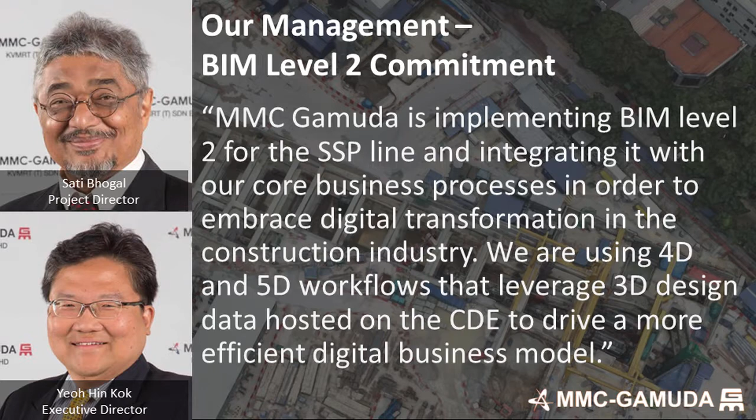So, two key characters, and Post-Inchok mentioned the importance of management support and C-suite level support, and these two characters have not faltered. Sati as a project director, Yeoh Hin Kok as the executive director, they have been hugely supportive. They have been dogged in their approach, and they are very committed to making BIM successful on the Line 2 project. And you can see that from the accolades.

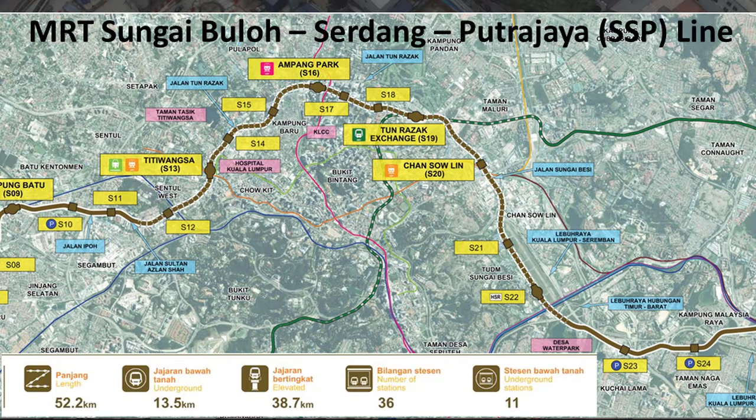So again, just to echo the detail that's already been provided by Post-Inchok, for the underground section, which goes from Jalan Ipoh through the city, connecting with the hospital, KLCC, Tun Razak Exchange, down through Bandar Malaysia, and out to Desa Water Park, that entire alignment, 13.5 kilometres of underground tunnels, 11 stations, 10 ancillary structures, and all of the other pieces of work were all designed in BIM.

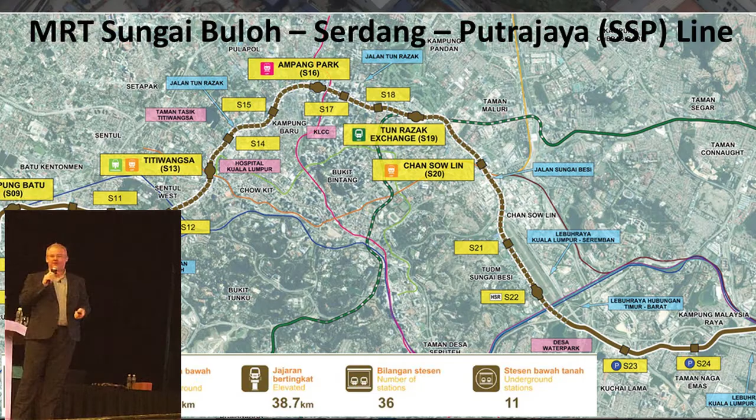So we're designed in Revit, drafted in Revit, and modelled. I'm going to show you some examples, and this is one of our stations. This is Chan Sow Lin. This is the station box where the first TBM tunnels have been completed. We have successfully completed both drives, and this is a model from that station, and this is the outcome.

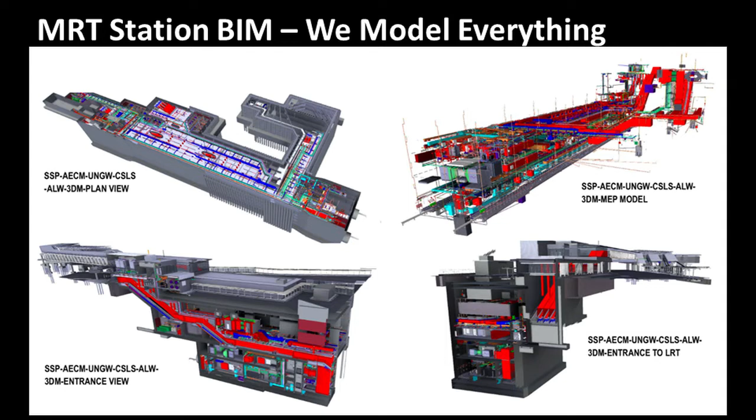Now, I love this presentation. This is fantastic. You guys look at this going, wow, it's so complicated. You would not believe how much heartache, how much hours of blood, sweat and tears, and how many arguments went into producing these models. You can see a structural model, you can see a building services model, you can see architectural models. The biggest challenge is managing to deliver these models in an environment where no one's done this before. So kudos to AECOM, kudos to SAA, kudos to all the consultants who stepped up and didn't give in and kept pushing and pushing to get us this level of coordination.

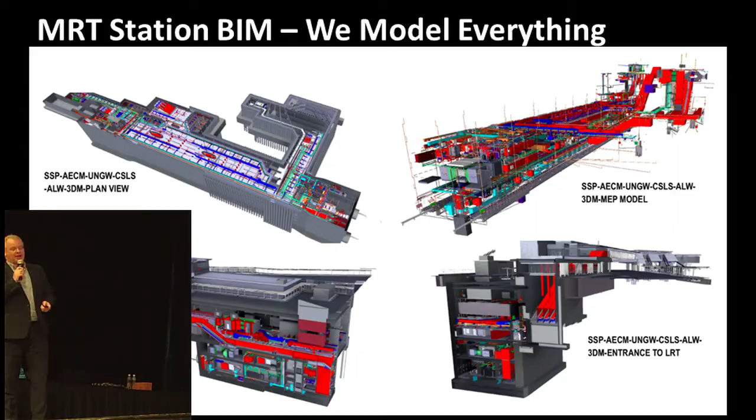It is an incredible amount of work, and it's never seen. Nobody ever stands up and says how many thousands of hours go into these models. So it's very important to recognize that there's a huge amount of effort goes to get us this level of coordination. This is the Chan Sow Lin site a couple of months ago.

How many people think this is an aerial photograph? Quick show of hands. A few people. Most of you have seen my presentation before. Who thinks this is a 3D model? Wilson knows. This is actually a 3D model of the construction site taken by drones. And for us as a contractor, this is one of the biggest innovations on the project.

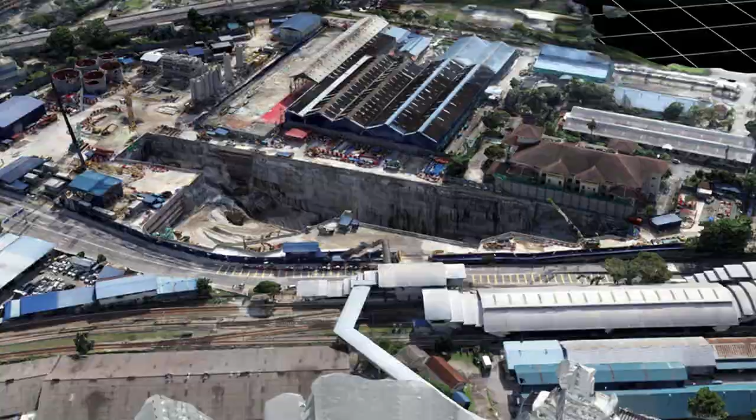Some of them were based in the project office, some of them were based in their home countries. So this was actually structurally modelled in Taipei. This MEP model was built between the Hong Kong office and the KL office. And you can see the complexity of these systems, you can see the density of the services.

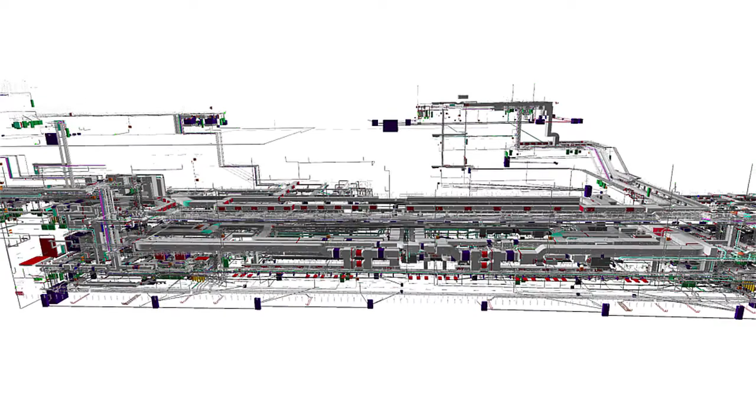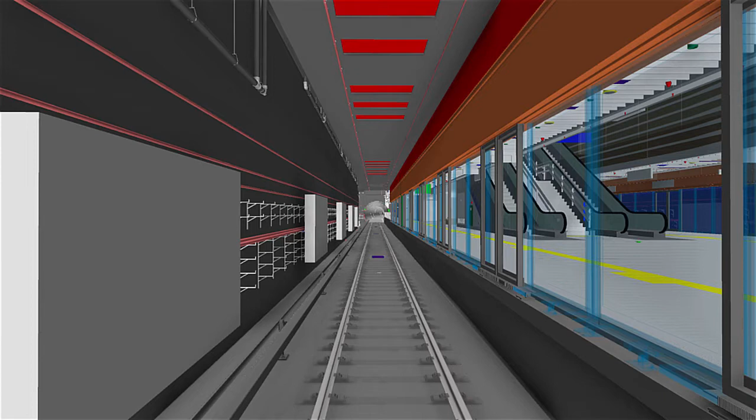And this is the OWC model. Again, big congratulations to the OWC contractors who've stepped up and delivered these models. And this is what it looks like on Line 2 arriving in Chan Sow Lin Station. We have the hangars modelled, we have the platform screen doors modelled, we have the vents modelled, we have the signage modelled. Everything that we have to build has been modelled and to a greater extent coordinated.

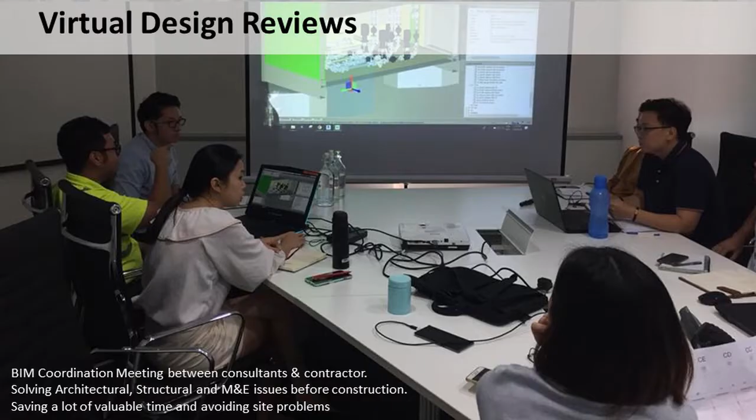One of the big challenges as a contractor working with and collaborating with consultants in a design and build is coordination. We've taken a very proactive approach with these VDRs, using the model and processes to manage the coordination.

We have a workflow laid out, a 7-step dance that we go through to create a VDR. I won't get into detail, but it's a repetitive cycle every 2 weeks: consultants produce models, we share them on the CDE, we run a coordination workshop, we share the outcome, and then we repeat, repeat, repeat. It's an ongoing, endless process.

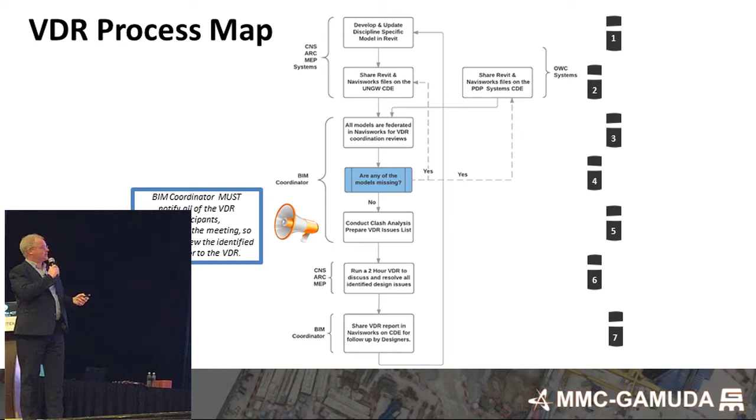The key point in running these VDRs, as already mentioned, is you have to make somebody responsible for identifying and fixing the problem. It's very easy to see a problem in a model - anybody who's looked at a 3D model can find problems. Getting the architects, engineers, even the coordinators to resolve those problems is crucial.

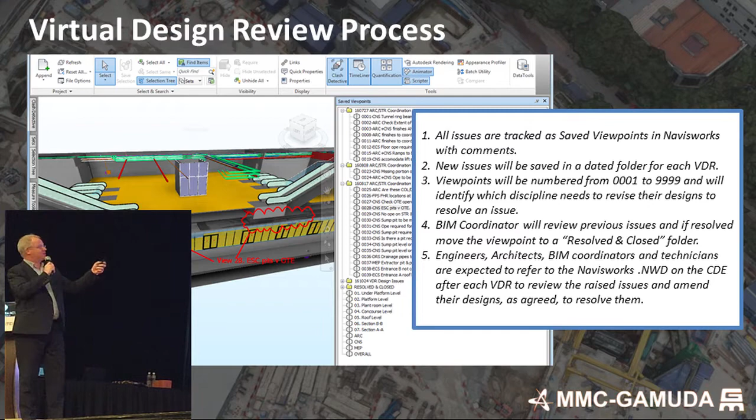So the system we set up between the consultants, ourselves as contractor, and the MRT was to use the common data environment as the go-to place to understand what the issues were. This is an example - a system we commissioned at MMC-Gamuda called BIM Collab, a web-based collaboration platform.

So a top tip: if you're going to run a BIM process, you have to project manage it. You have to identify the issue, allocate it to a party to resolve, give them a time frame to do it, and follow up to get completion.

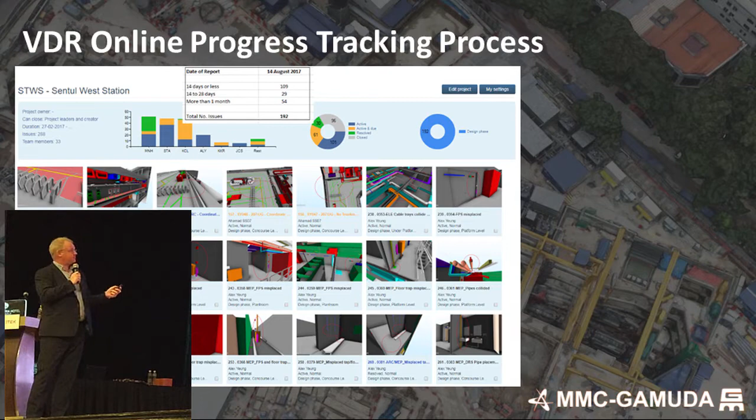This is an example of where we go from design detailing to construction detailing. The video I showed you for Chan Sow Lin shows all the hangers, all the supports. What we discovered was when we modeled in all of the construction systems - all the necessary hangers, all the secondary steelwork - we created a large number of issues that had to be further resolved. So we had more coordination to do beyond the design coordination, and we've managed to resolve all those issues, continuing with construction.

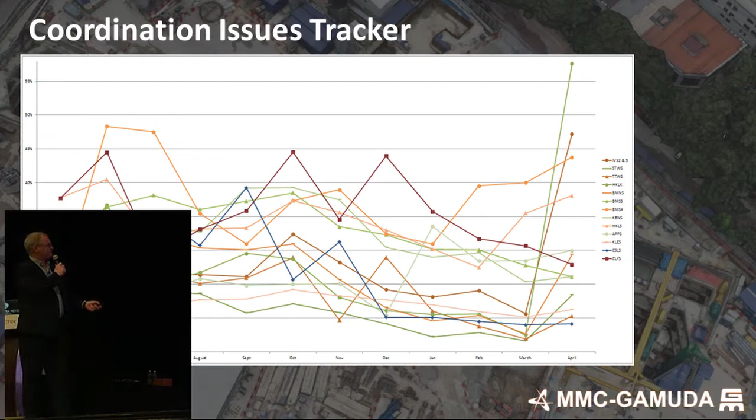Now, this is one of the things I call the theory of unintended consequences. We've spent a lot of time and effort training people to use the models, and we've got a lot of very clever, innovative people in our team. The team working with Nick and Rahimi came up with the idea that we can plan out all of the MEP works in terms of installation, testing, and everything else.

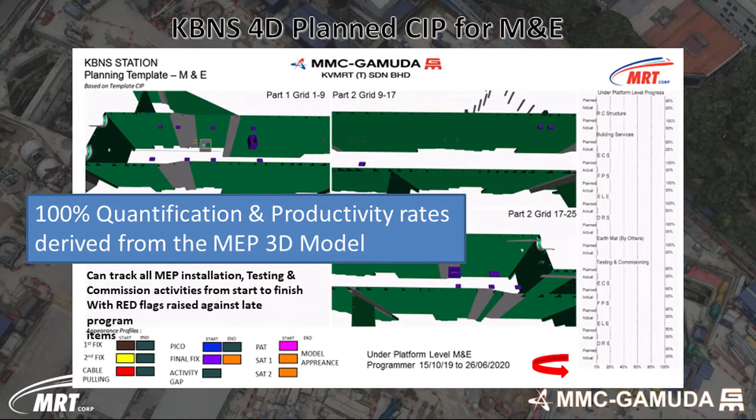What that looks like - these are 3 views from the platform of the Kampong Baru station, and you can see the list of activities. Now, as the management contractor, the planning is vital. Understanding what we have to do is vital.

But on this particular station, we're going to take this one step further. We're going to use digital forms on the construction sites to evaluate the actual performance of our teams in the installation against this plan. So we have a plan - we know when certain things should happen, and when it should happen in certain rooms.

We need to make sure the activities are done systematically, and we're going to use digital forms on site to track that plan. So we'll be able to see on a real-time basis: are we on schedule? Are we behind schedule? Have we got a particular system causing an issue? Etc. So the planning is just the first part.

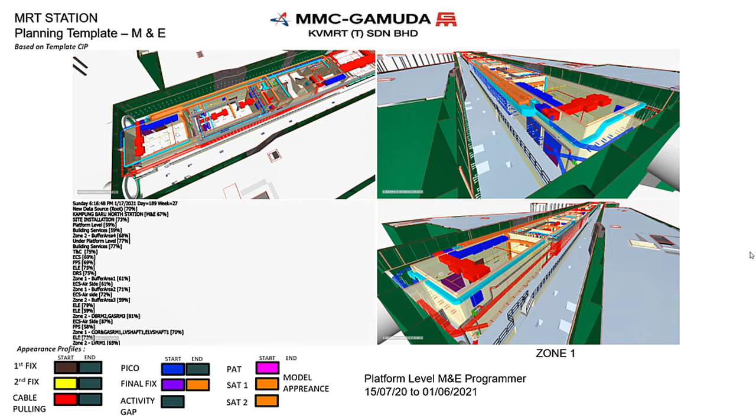The most important part is how we do this on site. This is another example of a 4D model, probably the same video Post and Chuck showed you. But essentially, we're using the 4D sequence to plan out our works.

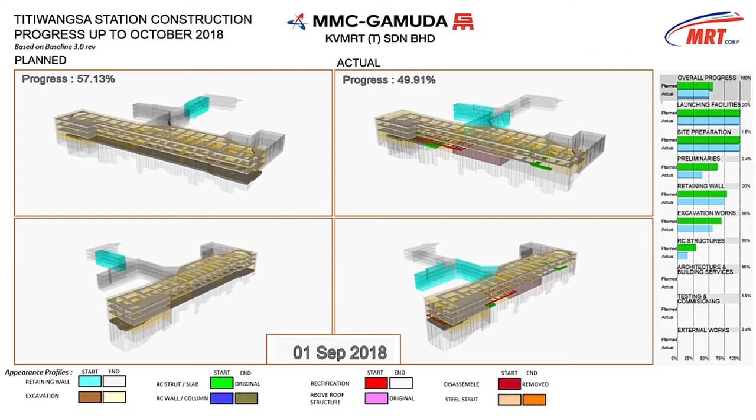And then we're using that to report progress. Now, people have been talking about the importance of asset management. BIM Level 2 fundamentally is not about models, it's about collecting the information to manage the asset going forward. And you cannot collect information if it's unstructured and basically out of control. So the one thing we've done, working very closely with the MRT, is to work on and develop this KVMRT classification.

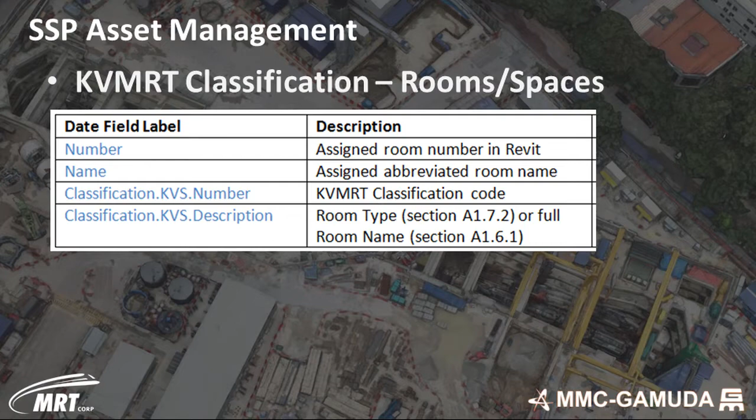And what that looks like in practice is everything has to start from a location. So we start by identifying all the spaces and rooms, and all of those individual spaces are then identified with unique names, unique codes. And then all the assets that go into those rooms are then coded in a very particular way to a very high standard of information.

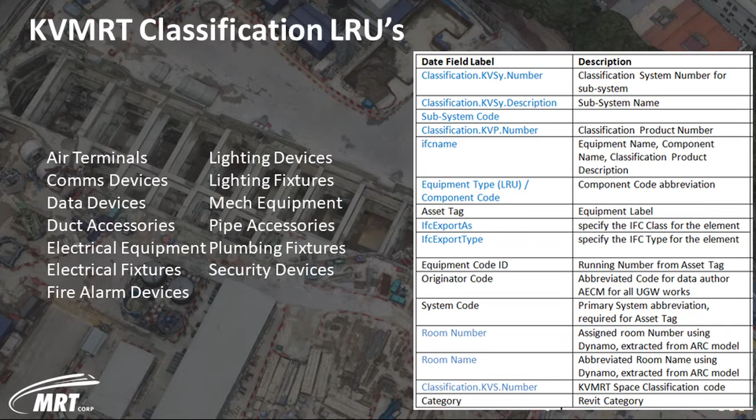And I will tell you, this is the hardest part to do. The quality in terms of the information input is absolutely critical. If there's a digit wrong, the system won't find it. If there's a letter wrong, the system won't find it. So the rigor required to make these systems work is very, very important.

So this is what it looks like. You have all of the different systems categorized. And the reason we're doing this is that when we go from the construction phase, which is where we capture most of this data, when we bring it into the actual asset management system, we can then find the components and link back to the information.

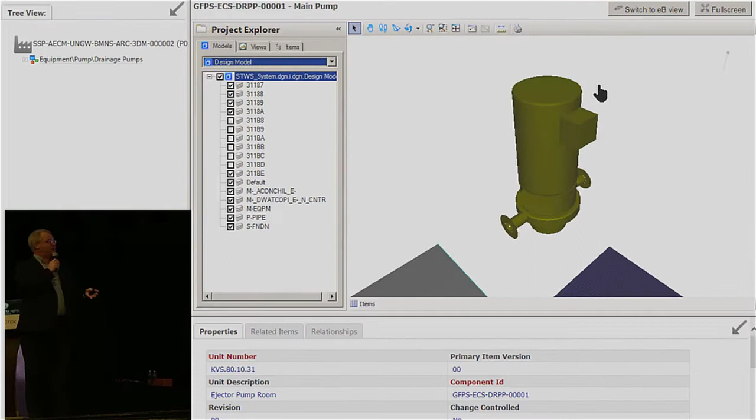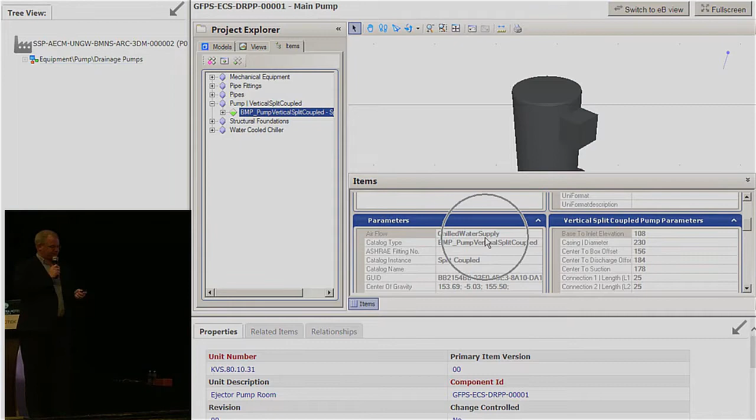So the asset classification, the asset naming is absolutely critical to make sure that we can link the model, the site, and the CMMS. And this is not to be underestimated. Anybody who takes this lightly is in for a shock.

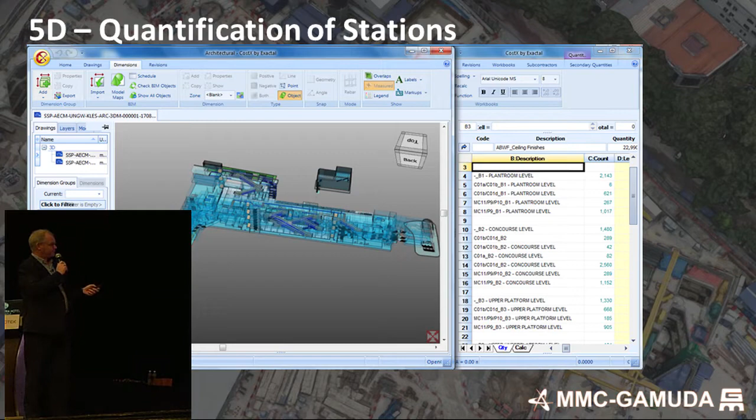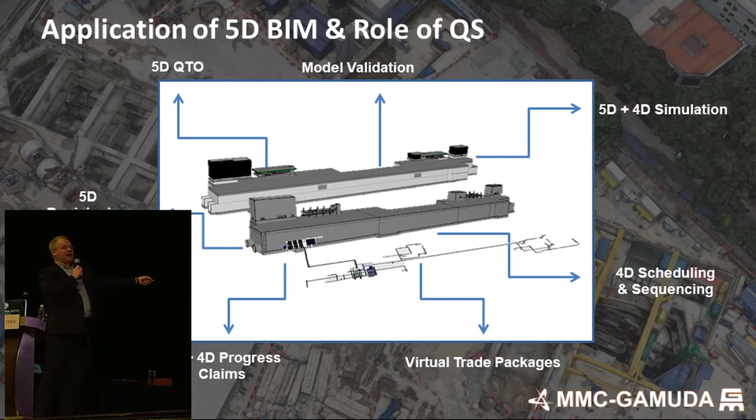So we can actually use the 5D to look at what work's been complete, what work we can claim for, and what work we can pay our trades and contractors for. So we're actually focusing more on progress claims and progress payments, not just on quantity takeoff.

So this is an example from a platform that we're using. The model has been brought into this platform. The software will go through the model, it will identify walls, columns, slabs, and then it will categorize all those objects. So if our classification is right and our model is of a good quality, we can do the actual quantification.

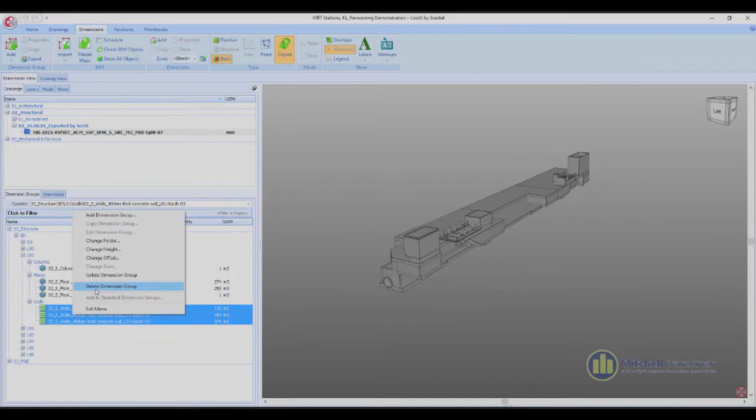So this will actually build up what you would consider a normal bill of quantities. So you can actually look at the bill of quantities by wall. It will tell you formwork areas, it will tell you reinforcement, it will tell you volume. And then we can use that as a mechanism for checking the volumes on the site. So the good thing with this is because we're doing BIM, we're able to leverage this technology as a contractor for cost management.

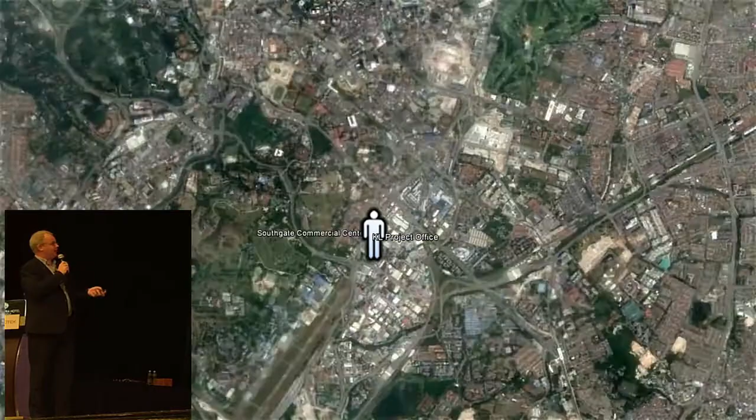Without this common data environment, we would not have been as successful as we have. And in this particular project, the MRT were implementing the CDE, and we participated in setting it up. So all the information is hosted at the Southgate Commercial Centre. The CDE is our single source of truth. It's our go-to in terms of information, and you can see the amount of information that we're storing on it.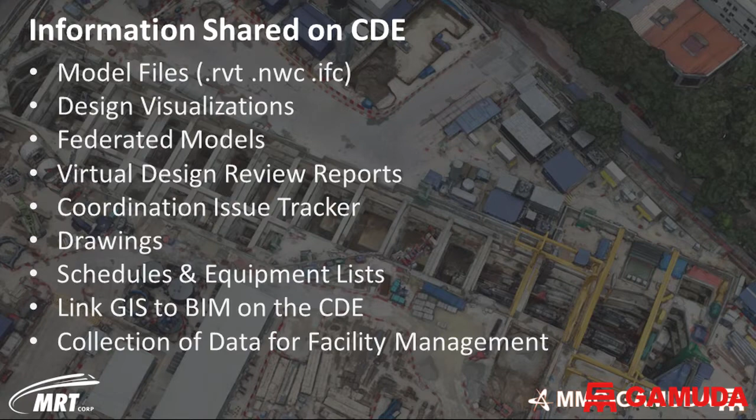Now, what the CDE has been able to do is unlock the value of BIM with GIS and internet cloud access. And I'm going to share with you what's going on in that space.

So the next two characters of my story are Mr. Pois, who's the head of surveying, and Tony Joseph. And Tony's actually here. Where's Tony? Give him a wave, Tony. Tony Joseph's here. Tony is our GIS expert and our digital data expert.

You can see the guys on site. The character on the right is a gentleman called John Lim. He's one of our graduate trainees. He's actually come up with some software to develop a self-driving TBM, which is a whole different topic for conversation. So we have very young, very competent engineers, and they're all going digital on site.

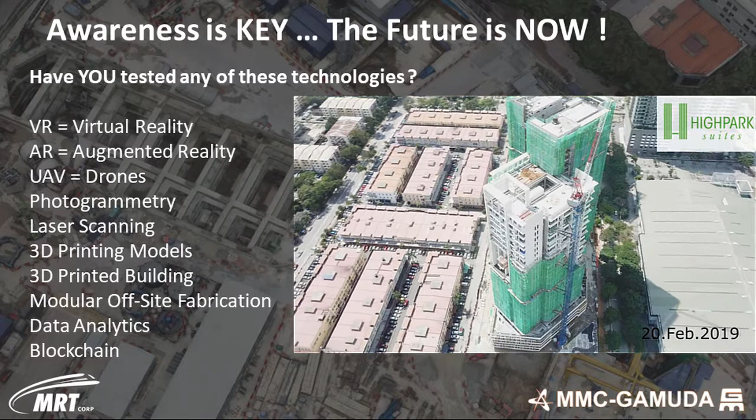This is drone footage of one of our other projects. The drones that started on the MRT project are now being used across our business. But I want to give you one key point.

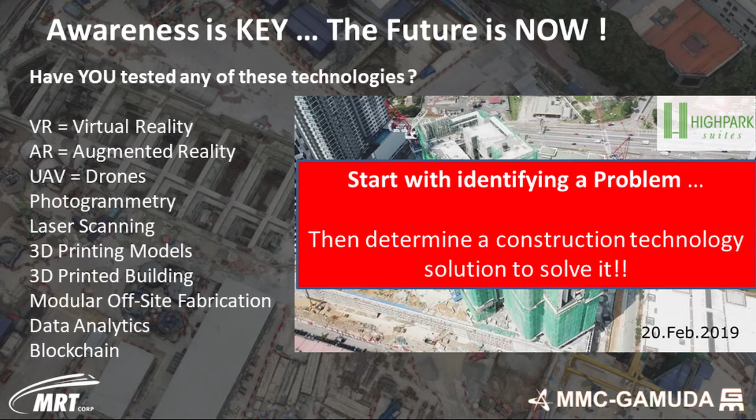All of these technologies, whether it's virtual reality, augmented reality that Chris has out in the front lobby, 3D printing, or laser scanning, we start with a problem and then look for a solution with technology. So when it comes to MRT, this is the laser scanning that was done.

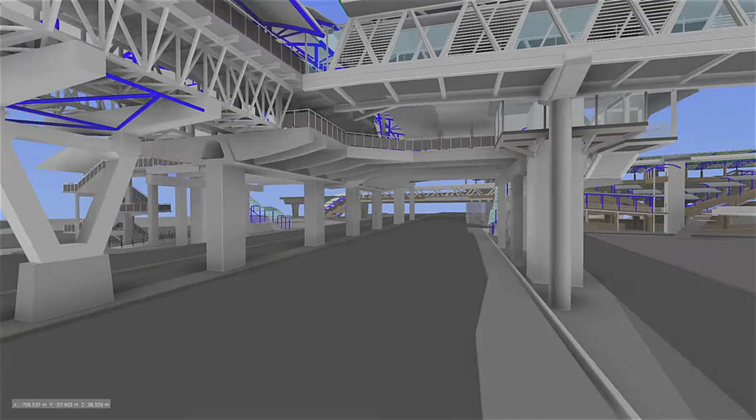The laser scanning was done by Mr. Pois' team, about 15 or 16 scans put together. The model of the existing station was developed by the MMC-Gamuda and AECOM teams. Then the AECOM and SAA team developed the connection, the large bridge, between the new structure and the existing facility. So collaboration is very important, getting the contractors' team to do the surveying and getting the design team to use and reference that survey information.

Laser scanning is very useful for as-built information. The drones we're using are Phantom 4 DJI drones. We're not just doing videos and flying around for fun, we're actually surveying the site.

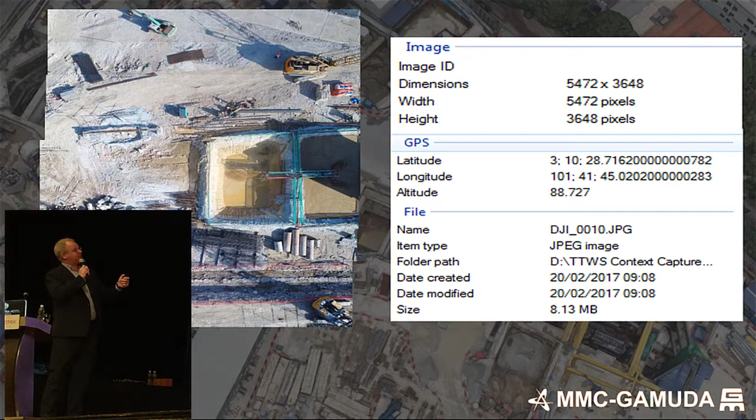Again, we're using Bentley Context Capture. We capture photographs with 70% overlap, and those photographs are then converted - to give you a sense of scale, that's myself and Nick, so you can see the scale of each photograph. The drone is about 150 meters off the deck.

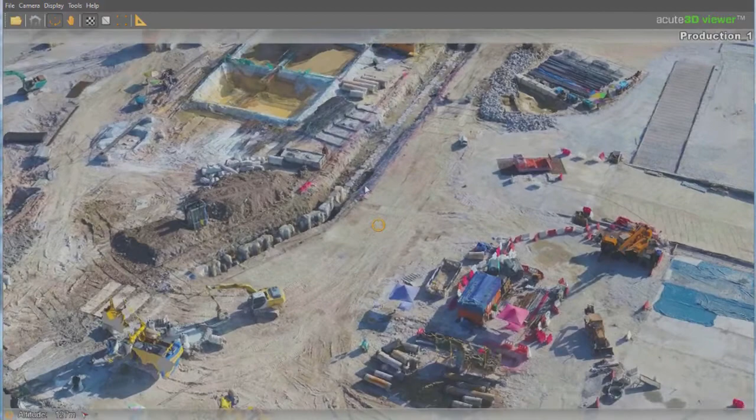So what we've done is convert the images to a 3D model. This is actually a 3D model of Titiwangsa, and you can see how we use that to measure the site. What's more important is that this is very accurate, to within a couple of millimeters.

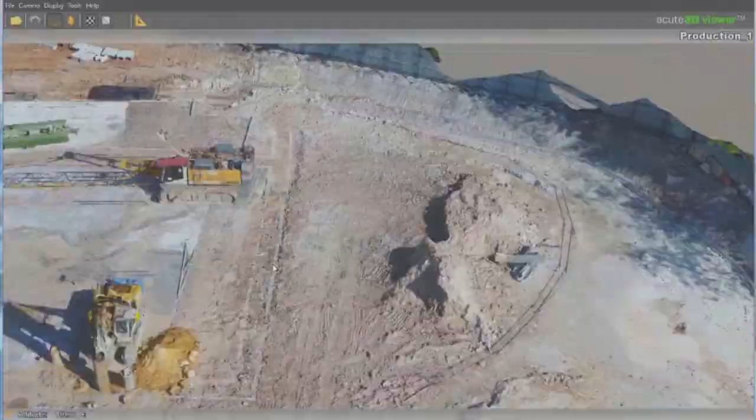So not only can we do this in terms of linking and measuring, we can measure soil volumes, we can measure distances. We've also been able to link our design model to our construction site.

We can take that same survey topographic model and overlay our construction model. So we can actually look at the progress of work in terms of the secant pile wall locations, how they're tying in... and the video stopped.

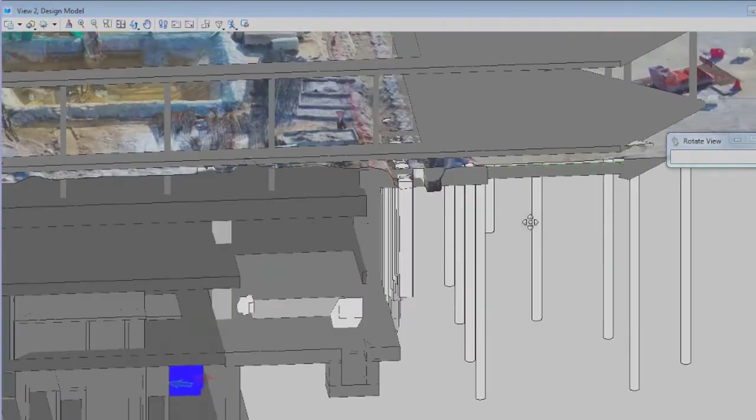We did the same thing for the D-walls. So for us, the drones have given us a quicker way of surveying, making us more productive on site. We now have the ability to go back and review construction sequences using the drone's 3D models. Because we're flying the site on a regular basis, we can go back and look at the construction sequence based on the drone footage.

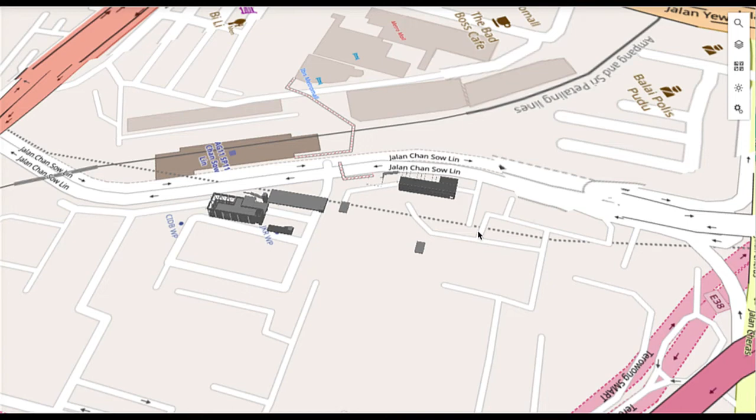Again, each of these is a full 3D model, not just an image. This is the GIS platform, this is online. This is a video taken from a browser, and what you're looking at is the Chan Sow Lin station.

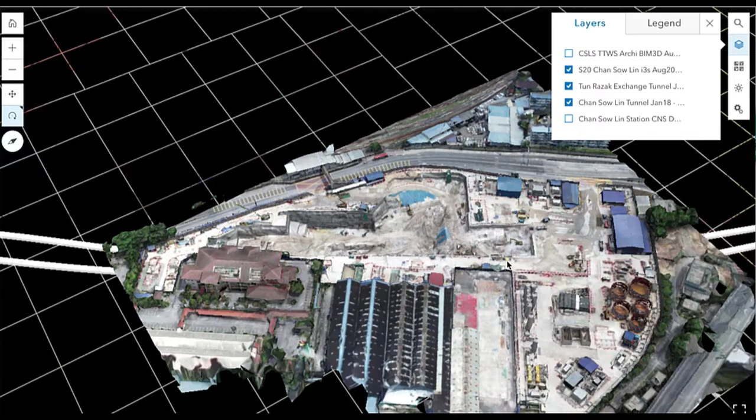It's the 3D model, on the CDE, accessed via a browser. We've also incorporated the drone-created topographical model, and that model has also been loaded onto the CDE and made available through the browser.

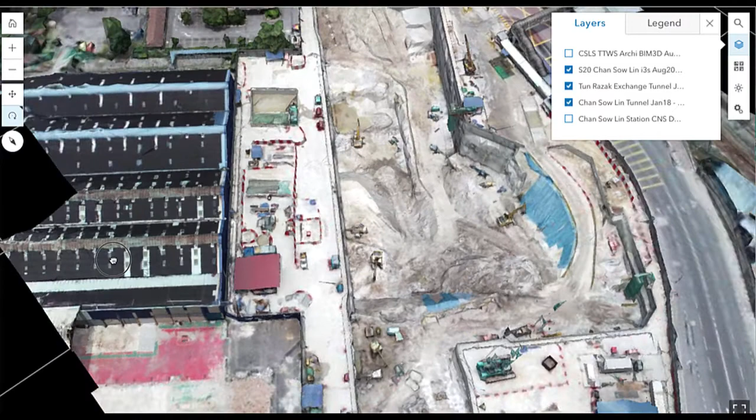So on a normal PC or an iPad, you can get online and view these models over the internet. You don't have to be using a very powerful BIM workstation, which is absolutely crucial so that people can get access to the models.

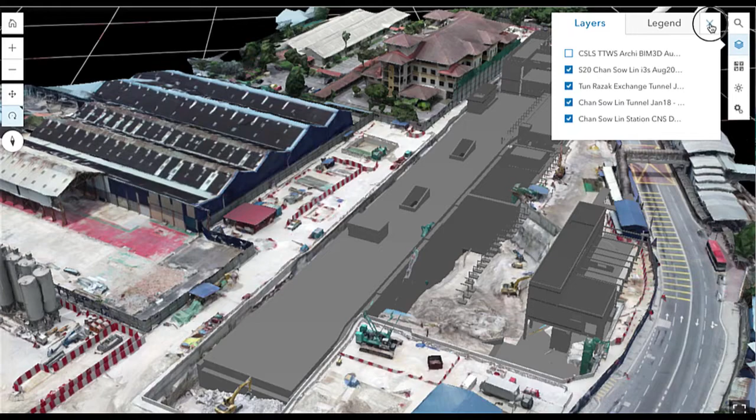With some very basic training, you can figure out how to overlay the design model and the photogrammetric model on the browser. Using Chrome, you can see the model and the site 3D model. We've got this set up for every one of our sites. Our project managers and project directors have the logins, and they can go and look at any individual site themselves at any point in time.

So we think putting the information online is crucial. One of the other things we've done recently - and I'm not taking any credit for it, this is all Tony Joseph's handiwork - we've managed to link data from the TBM drives, coming from a Maxwell Geosystems dataset, onto the same GIS platform.

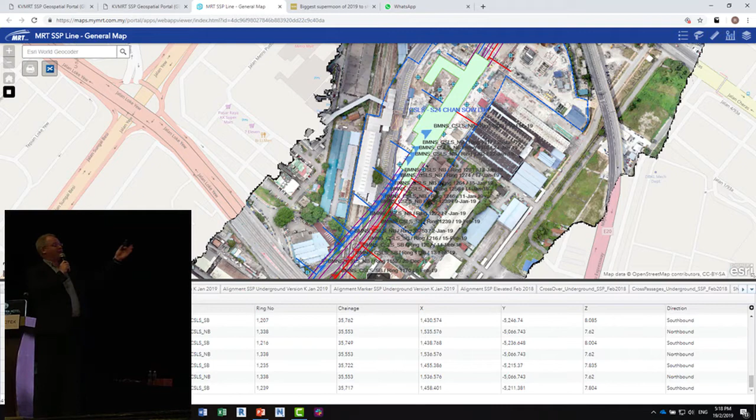Using the same GIS interface, you can log onto the browser and tell where each of the TBMs is in real time. We can go online - we have 6 TBMs, 6 tunnel drives going on right now. We can tell by looking at the online browser exactly where they all are in terms of actual real location. This is really important for us, having real-time access to real information.

So the last two characters of my story, John Lim, who I was wearing the VR goggles earlier, and David Kong, our QA/QC manager.

And this is our digital site team. All of these people have been trained to use the digital forms on site, and they're now training all of our staff. What's interesting is that what started off as a BIM exercise on the underground, the digital forms, was a byproduct - an unintended consequence. But what's even more impressive is that unintended consequence has spread beyond the MRT to all of Gamuda's construction businesses.

So if you're working with Aloysius on a building unit, he's using digital forms on site. If you go to one of our housing projects, we're using the same digital form process. So the great thing with the MRT's approach to digitalization is it's propagating way beyond the boundaries of the MRT.

As Post and Chuck already mentioned, we have digitized hundreds of forms, and all of our different forms are now digital. So when you go on one of our construction sites, if you're one of our engineers, you will have a smart device - Android or iPhone, predominantly Android - and you will be trained how to create, fill in, complete, and submit all these digital forms. It has been massively beneficial from a productivity point of view, and hugely successful, with all of our trade contractors now getting involved and asking to participate.

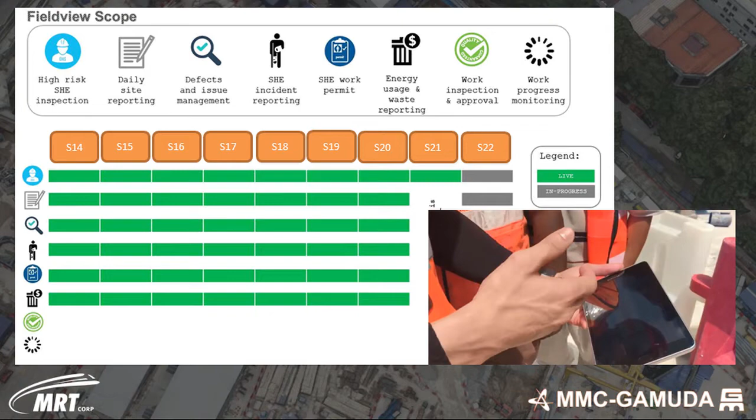Now, we don't stop at one level of success. We're now looking at how to leverage the data we're collecting from these digital forms. So we're doing some very serious research and work on not only capturing these digital forms, but using them for reporting - and not in the sense of creating a PDF every two weeks, but doing it in real time.

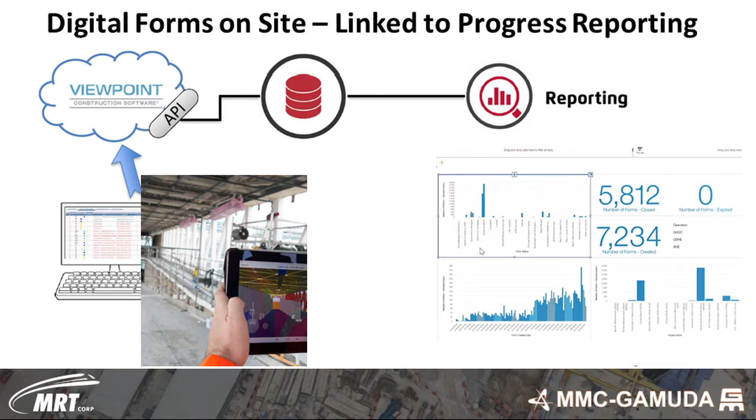So what I'm going to show you now is a demonstration - I guess the best description - of a dashboard of all of our forms. The data you're looking at is actually online, based on the CDE. I can click on a station and the dashboard will change. I can click on a type of form. So if I get to the next station, the operator might pick maybe on QSHE.

So what's happening is the actual information from site is instantaneous, based on the forms, based on the data. I can interrogate safety information, I can interrogate quality information, I can interrogate a site, I can interrogate a group of sites, I can drill down to the level of individual contractors. So we're now figuring out - and I say that deliberately, we haven't got it all figured out - but we're working on a plan to use the digital site forms to change how we report and how we monitor our projects.

And this is another important thing: training. Again, ourselves and the MRT have worked diligently and endlessly on training to try and bring up the skills, the knowledge, and the information around the industry. We still don't train enough people. We still need to do more.

But I'll leave you with this idea: training is not about putting people in a room and talking at them for the morning. So we're looking at all kinds of training - peer-to-peer training, on-the-job training. We've even gone so far as to develop an online e-learning platform. So we're now in Gamuda using e-learning to actually train our staff. Training is an ongoing thing and everybody needs to do more of it.

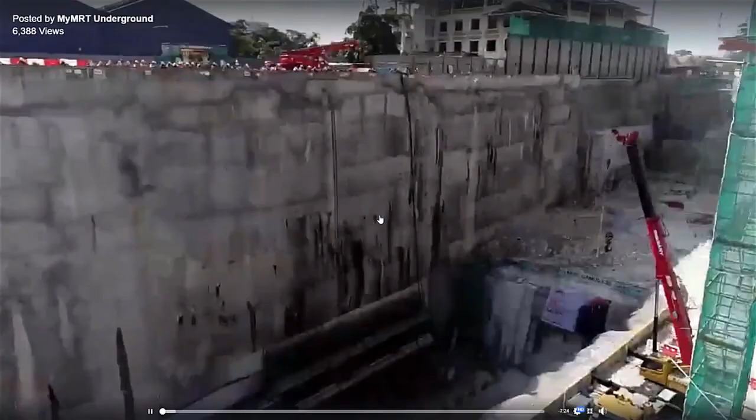And the reason I say that is that social media and our innovations have recently collided in a most unexpected way. This is the breakthrough of the first tunnel drive, and this is a video that was streamed live from one of the drones that we run on the survey team to our social media channel. Over 150 people, not all Gamudians, were watching the tunnel drive from the comfort of their office over the internet, in some cases on a phone. So we actually took the world of BIM to the world of drones, and now we're sharing major civil engineering successes through the medium of social media.